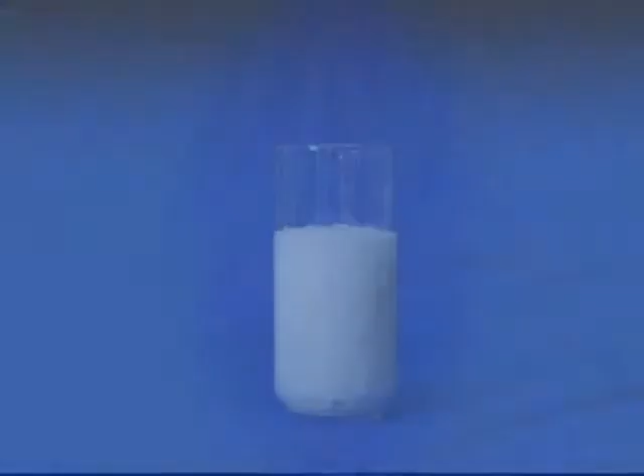Milk, homogenized, pasteurized, packaged, refrigerated, and wholesome. But back in the 1800s, even with ingenious inventions automating the dairy industry, maze-like piping and hard-to-reach surfaces made cleaning and sanitizing difficult. In the early 1900s, dairy products were transported slowly and left outside. There was little protection from contamination and spoilage, especially in summer months when all food spoiled quickly.

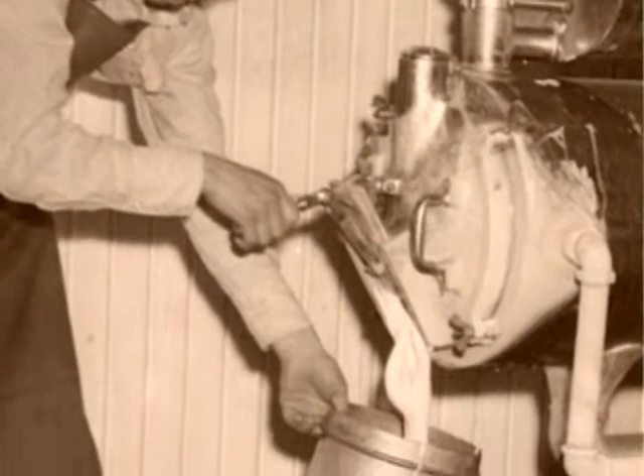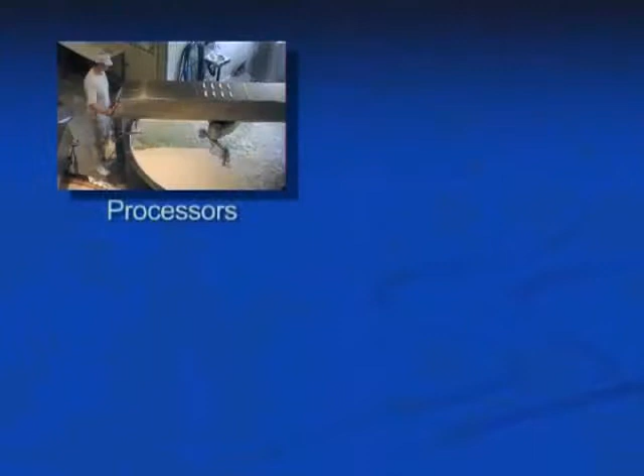The quality of life in America needed more than ingenious inventions. And once again, the dairy industry took the lead with innovations in sanitation. During the 1920s, the forerunners of three present-day associations started to develop more stringent and uniform standards for dairy processing equipment. The discussion included processors, sanitarians, and equipment manufacturers. Together, they published the first industry equipment standards, which became known as the 3A Sanitary Standards, named for the three groups that had combined their efforts to improve equipment, design, and sanitation.

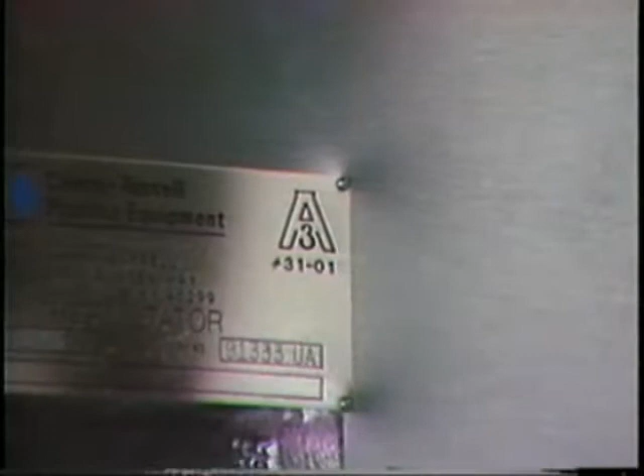In 1944, a dairy industry committee was formed, and the U.S. Public Health Service offered full cooperation with the 3A program. This marked the beginning of a program to provide uniform equipment standards for the protection of public health. And in 1954, the first processing equipment bearing the new 3A symbol was revealed at a dairy industry exhibition. Now, processing equipment could be shown to meet certain material, design, and fabrication standards for cleanability and inspection. The chances of milk being good for you were better than they'd ever been before.

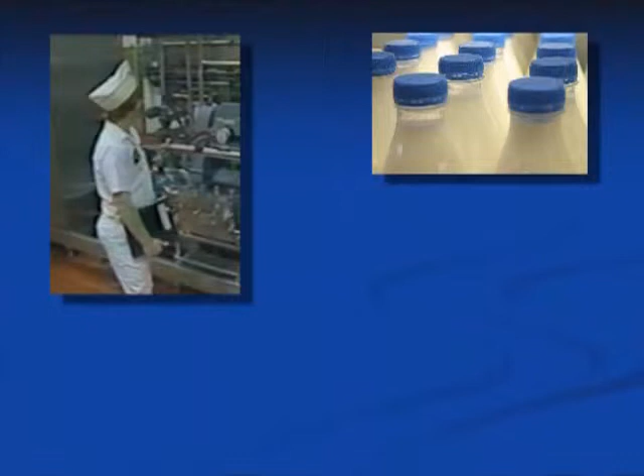In 2002, 3A Sanitary Standards Incorporated was organized. 3ASSI is a not-for-profit corporation governed by representatives of the stakeholder groups: processors of dairy food products, federal, state, local, and industry sanitarians, academic institutions, and equipment manufacturers. 3ASSI today is responsible for overseeing the growing inventory of standards, the 3A symbol licensing program, and much more.

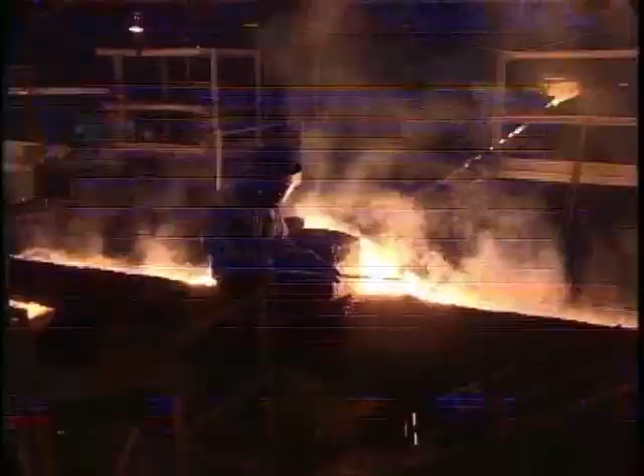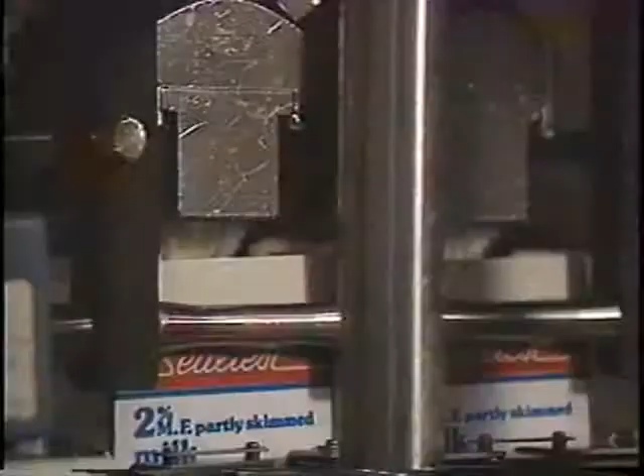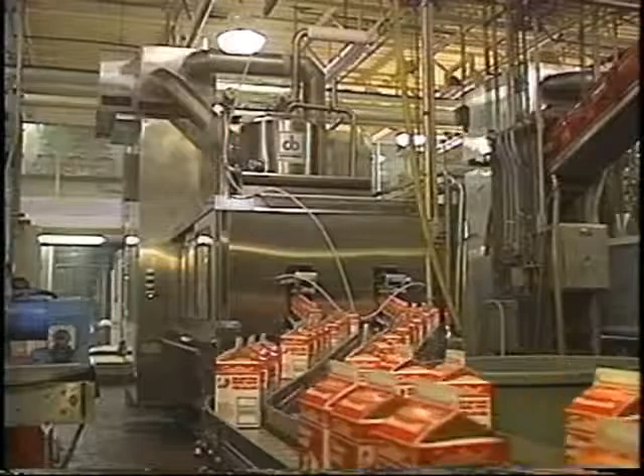Today, there are approximately 80 3A sanitary standards and accepted practices. More than 360 companies from across the U.S. and 22 countries around the world hold authorizations to display the 3A symbol on various types of processing equipment. The 3A sanitary standards combine material, design, and fabrication criteria to assure the cleanability of dairy equipment. The goal is to protect consumable products from contamination and to ensure that all product contact surfaces can be properly cleaned and sanitized. Before 3A SSI authorizes display of the 3A symbol, manufacturers must conform to established criteria in the 3A sanitary standard for the equipment.

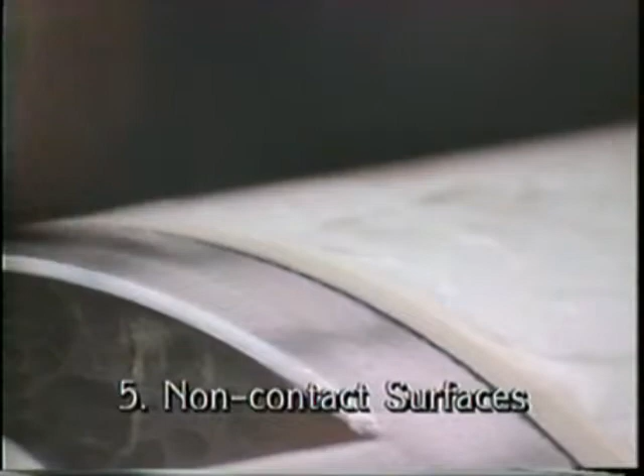First, equipment must be manufactured from specified corrosion-resistant, non-toxic, non-absorbent materials that can be maintained under its intended use. Contact surfaces must be smooth, non-porous, and free of flaws that could harbor residue and bacteria. Equipment must be designed to be effectively cleaned and sanitized, as well as be accessible for inspection. Equipment must also be designed to protect its contents from external contamination, and all non-product contact surfaces around the equipment must be cleanable. Together, the application of these equipment standards reflects the goal of the 3A Sanitary Standards program, the protection of public health.

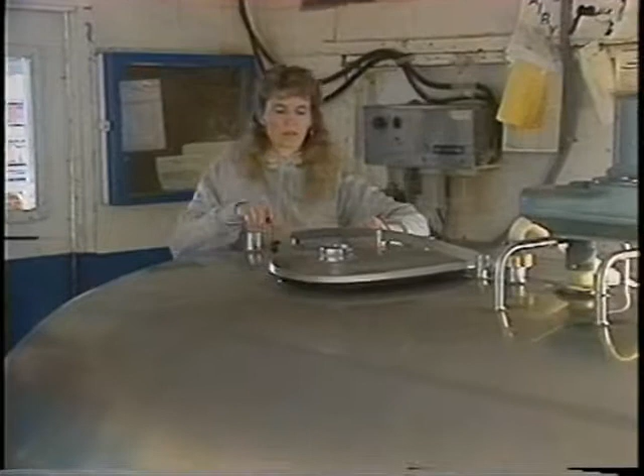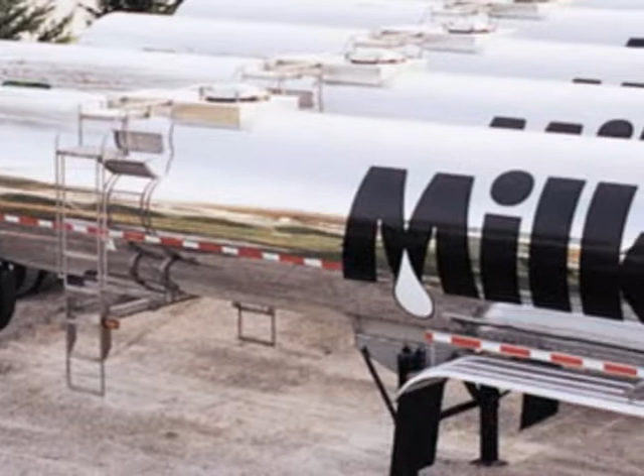On the dairy farm where milk is held in refrigerated storage tanks, the 3A symbol shows that the material and cleanability standards were built into the equipment at the time of its manufacture. On its way to the dairy, milk is transported by stainless steel tanker trucks that meet the same strict standards for materials and cleanability. Once inside the processing plant, milk products flow through equipment that has met yet another set of stringent criteria.

These 3A sanitary standards, which apply from the farm to packaging, are formulated and developed through the diligent volunteer collaboration of equipment manufacturers, processors, sanitarians, and regulatory authorities. The 3A symbol assures that the processing equipment has been designed and built to exacting sanitary standards and properly verified. When consumers reach into the dairy case in the supermarket or the refrigerator at home, they have more assurance than ever before that yes, dairy foods are wholesome.

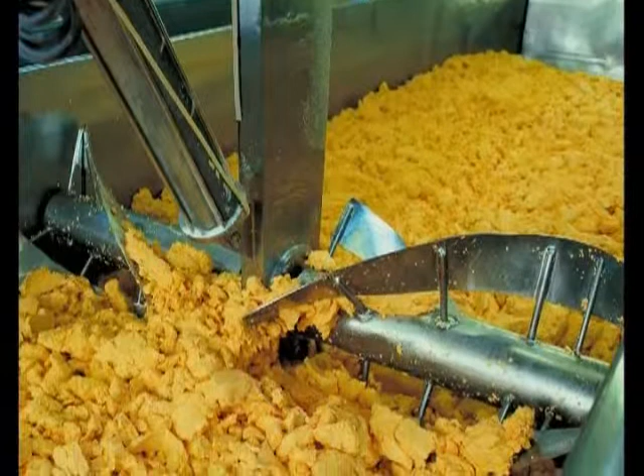The 3A symbol on a piece of processing equipment is far more than just another logo. Over decades of use in the marketplace for food processing equipment, the 3A symbol has earned special stature and recognition, even more so today with independent verification of equipment required for use of the mark.

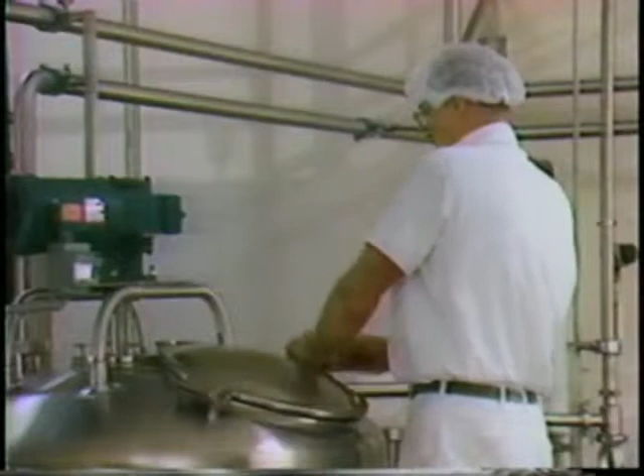Users of dairy processing equipment trust the 3A symbol because it shows that the equipment meets sanitary design criteria approved by regulatory sanitarians and others. They know that the equipment they specify or purchase with the 3A symbol will be easier to clean and maintain, and that the inspection will go more smoothly because equipment conforms to standards that sanitarians help formulate.

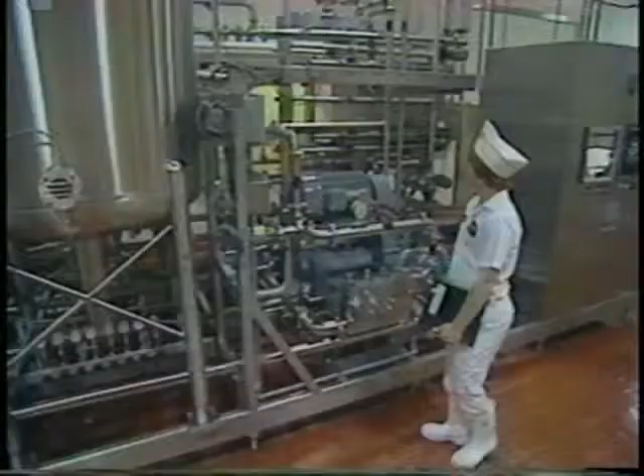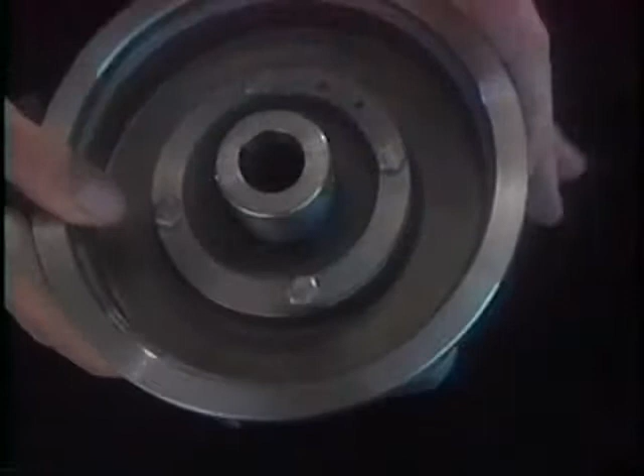Regulatory sanitarians benefit through these guidelines for uniform evaluation and compliance too. The 3A symbol signifies that the equipment is compatible with regulatory requirements and guidelines. They have assurance that the equipment was designed and manufactured to a precise set of standards that embody decades of expert knowledge about sanitary design and inspection from regulatory professionals and others.

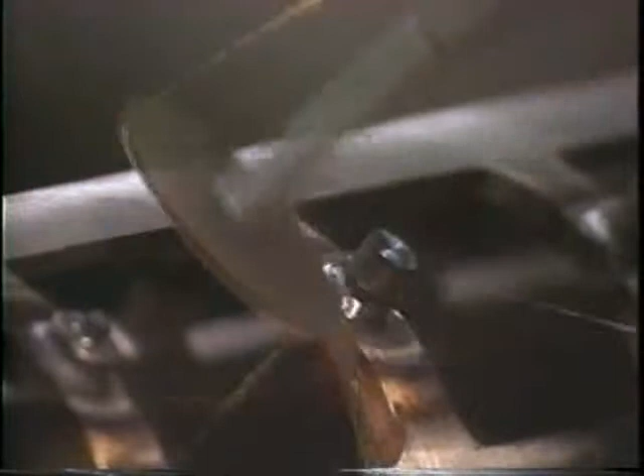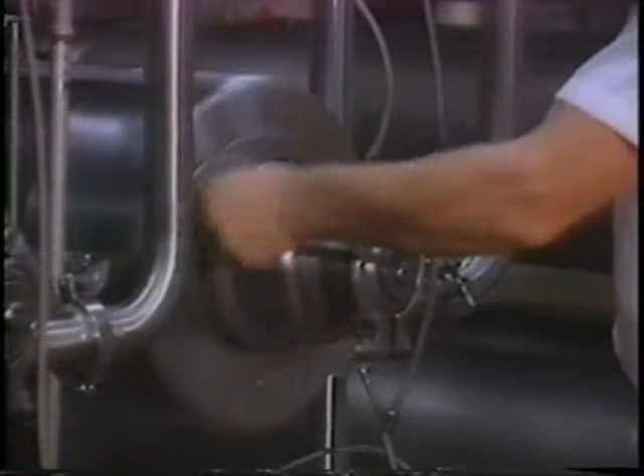Equipment manufacturers gain broad recognition and acceptance of their products across the country because the 3A symbol shows that the equipment conforms to proven sanitary design criteria. The 3A symbol helps streamline the equipment inspection process since it receives approval by virtually all sanitarians and regulatory officials.

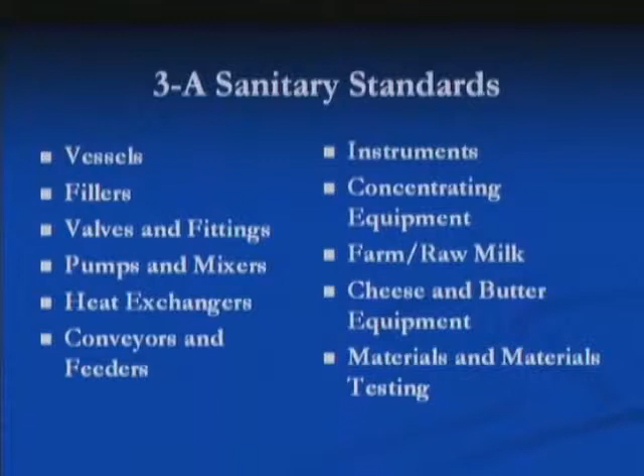Each standard details the sanitary aspects of materials, design, and fabrication, so the equipment will be universally acceptable to processors and sanitarians. And standardization reduces the cost in dies, tools, maintenance, and extended delivery time that would result without uniform criteria.

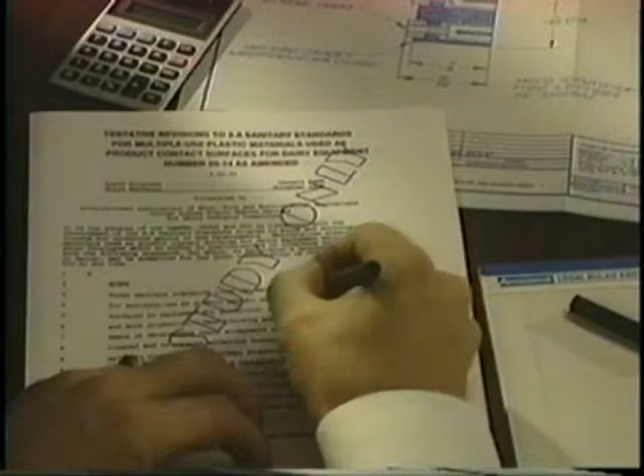3A sanitary standards and accepted practices are being constantly developed, revised, or amended by work groups of subject matter specialists within 3A SSI. First, a group of experienced standards professionals from the stakeholder groups, known as the 3A Steering Committee, determines the need for a new project or a revision. Once approved, the project is assigned to a work group where it goes through a rigorous consensus process involving regulatory sanitarians, processors, and manufacturers.

The 3A sanitary standard or accepted practice must then meet specific majority requirements in the work group before going on to a second level of public review and approval by a designated voting body, balanced by the 3 interest groups. When a standard has been approved, manufacturers may apply for authorization to use the 3A symbol. To display the 3A symbol, a company must complete an application signed by a responsible company executive affirming that the equipment conforms to the appropriate standard and that the company will observe all provisions of the license agreement for use and display of the 3A symbol.

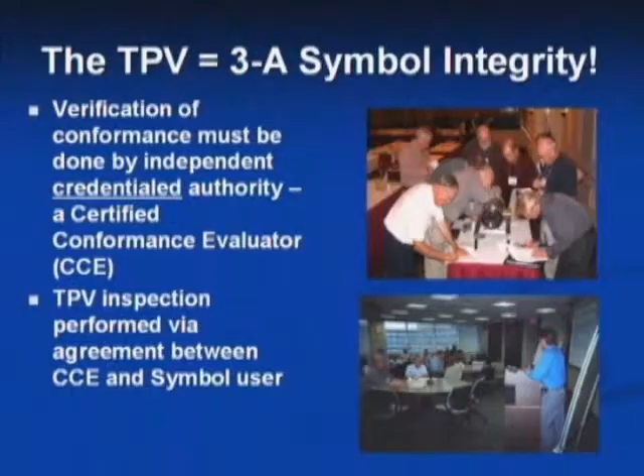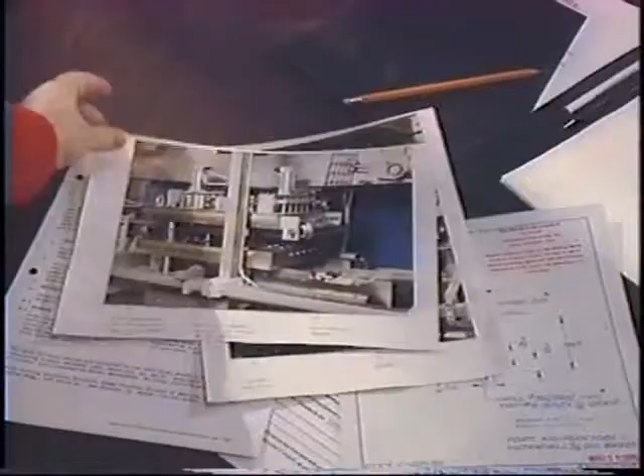The company must engage a qualified independent equipment expert credentialed by 3A SSI, known as a Certified Conformance Evaluator or CCE, who will inspect finished samples of the equipment to be listed on the 3A symbol authorization. The CCE must perform the third-party verification or TPV inspection at the site of manufacture or final assembly of the equipment. The TPV inspection includes a comprehensive review of the finished equipment design drawings, quality assurance practices, materials certifications, and a sample of the actual display of the 3A symbol.

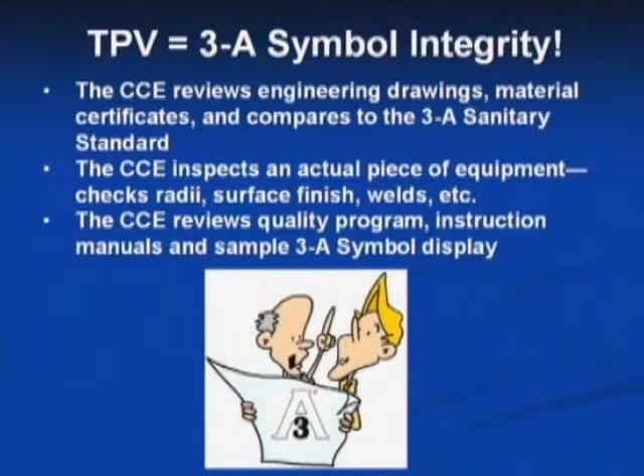When the inspection is completed and conformance is verified, the CCE sends a copy of the report of conformance to 3A SSI. The fabricator sends a copy of the TPV report to 3A SSI with the completed application and payment. 3A SSI reviews the application package, and if it is complete and satisfactory, the manufacturer is authorized to utilize the 3A symbol.

This application process, with the added assurance of the independent TPV inspection, helps all parties trust the equipment that displays the 3A symbol meets strict standards for design, fabrication and cleanability, establishes for sanitarians reliable guidelines for uniform evaluation and compliance, and provides equipment manufacturers proven criteria for sanitary design and fabrication.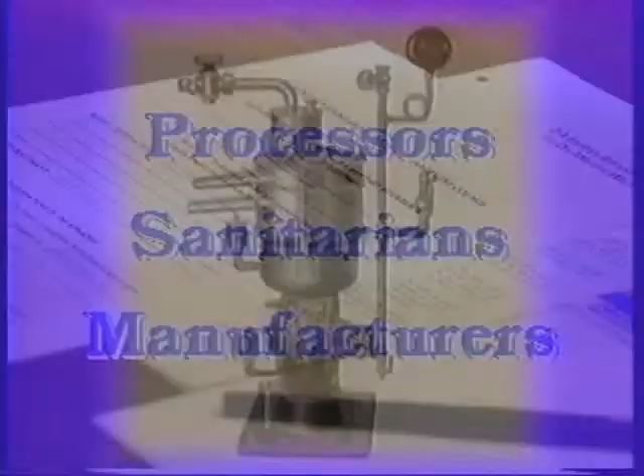The 3A Sanitary Standards program was a good idea early in the 20th century. It's even a better idea today and will continue to serve the dairy and food industry in the future. By keeping pace with modern technology, the 3A symbol program continues to assist processors, sanitarians, and equipment manufacturers. Just as important, the program helps ensure that milk and other dairy products will remain safe and wholesome for all consumers.